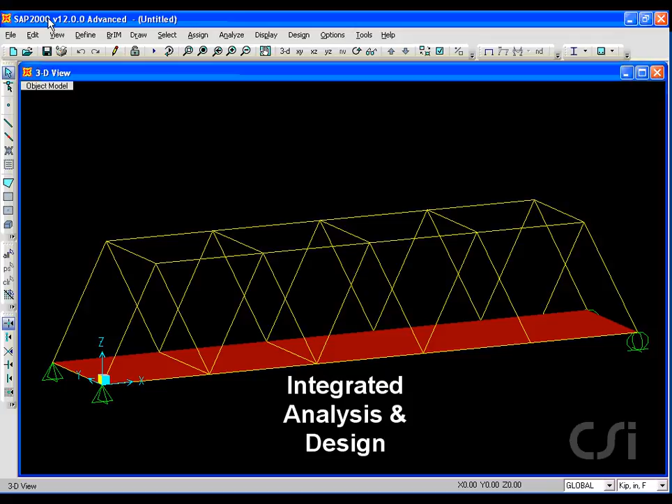Welcome to SAP 2000, a comprehensive yet easy to use, state-of-the-art finite element analysis and design package. In this tutorial, we will create a simple 5-panel truss bridge constructed of steel 4x4 double angles with a concrete deck.

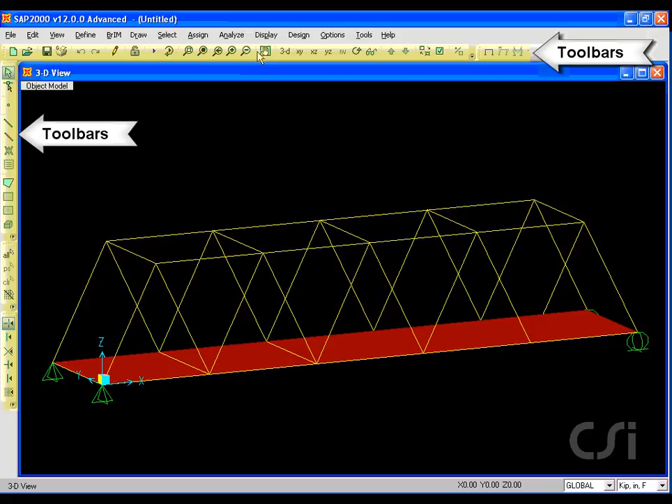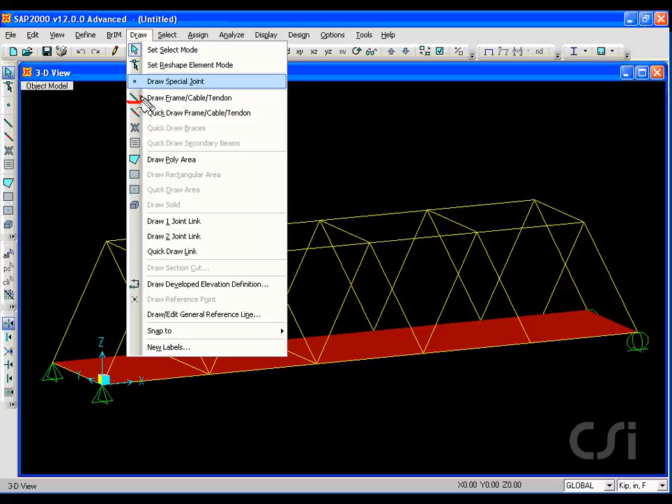Before we get started with modeling, let's take a quick look at the SAP 2000 interface. All the options are available through the top menu bar. Toolbars offer buttons that provide access to commonly used commands, including snaps, zooms, and views. An icon next to a menu command indicates that this item is also available as a one-click button.

Typically, one defines materials and section properties, draws the physical objects, selects these objects, and then assigns properties and loads to the objects.

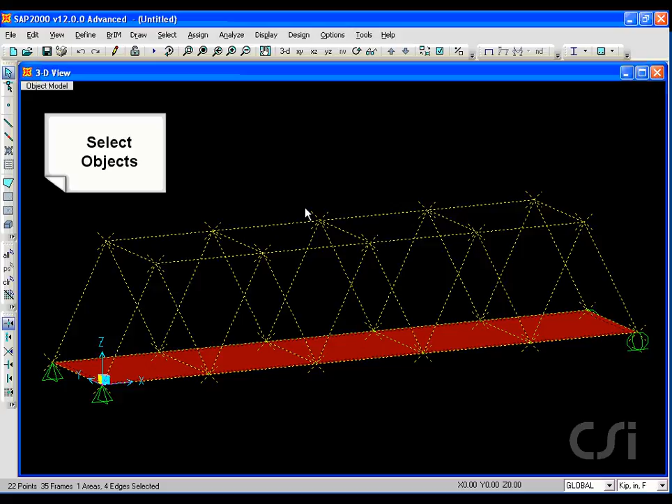We start the modeling process by clicking on the File New Model command. SAP 2000 offers a wide range of parametric-based templates to help create your models, including a slope truss template that is similar to our model. However, we will start by using only a grid definition.

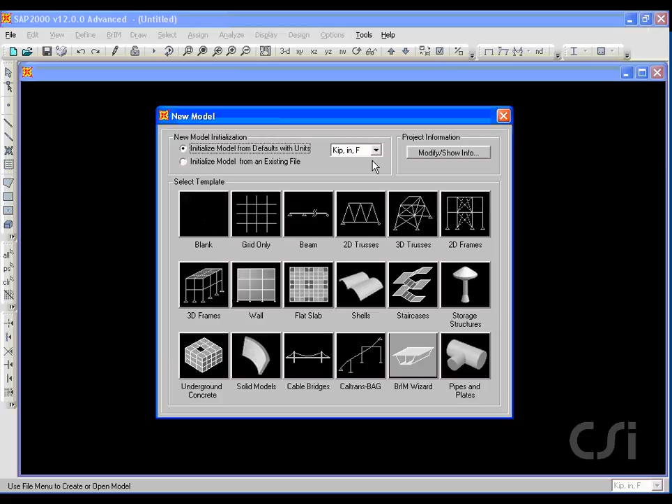A thoughtfully planned grid system can result in enormous time savings, so spend some time at the start to make sure your grid captures the main geometrical features of your structure. Note that we will use the units of kip inches as our default, but that the units may be changed at any time. Click on the Grid button and input the number of grid lines, followed by the spacing values.

Note that by explicitly specifying the units, we can enter these values in feet rather than inches, and the program automatically handles the conversion.

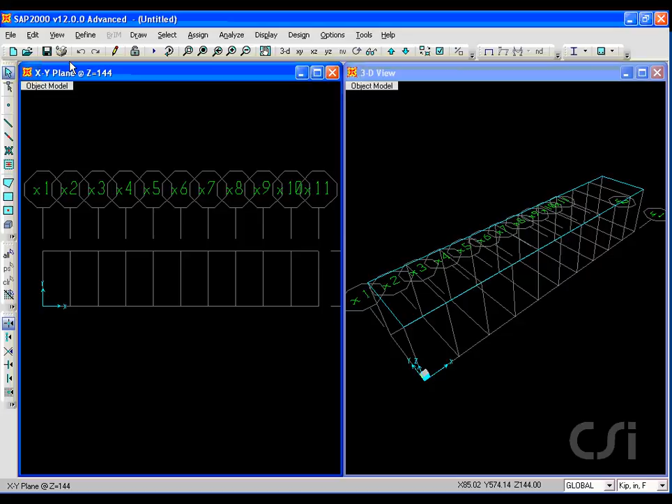Directly under the display title bars is an indicator showing the model status. This indicator will display either object model or analysis model. Objects represent physical members and are typically what the user draws in SAP 2000.

To make viewing our model easier, we will reduce the size of the grid bubbles. This is done through the Coordinate Systems Grids command, and we will use a bubble size of 36.

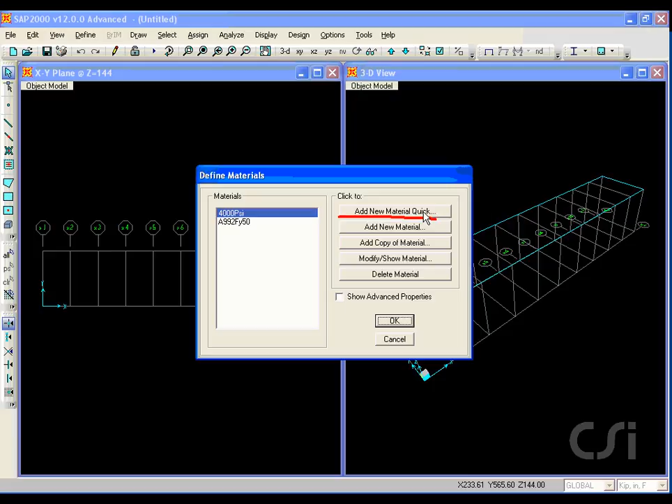Next, we will define a material to be used for the double angle sections. Click the Define Materials, and then click the Add New Material Quick button. Select Steel from the Material Type drop-down list, and then ASTM A36 from the Specification list. This is all we need to do to define a material when selecting from the pre-defined standards.

Next, define the truss objects by clicking on the Define Frame Sections command, and then click on the Import New Property button. Verify that steel is showing in the property type list, and then click on the Double Angle button.

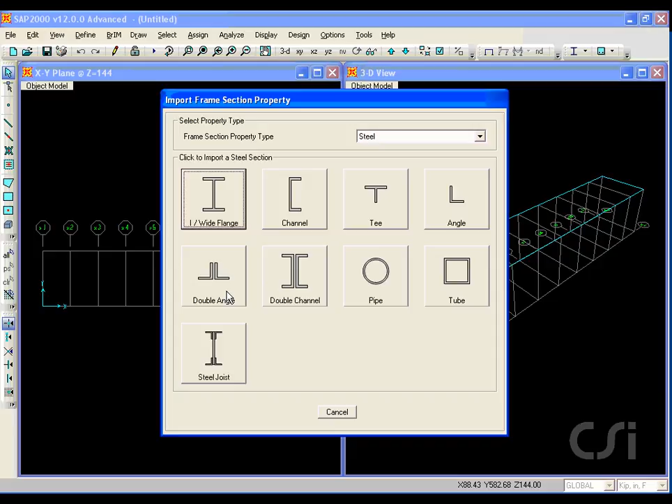Select and open the section database, and select A36 from the material list. Clicking on the plus button allows editing of the material or additional materials to be added.

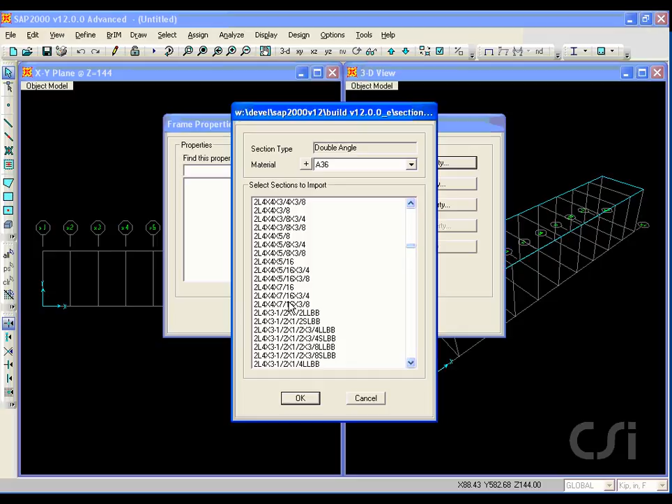Scroll down the double angle list until you locate the 4x4s. Select the entire group by holding down the Shift key and left mouse button simultaneously.

Now that these sections are available to the program, we are going to assign them to an auto-select sections list. This list will tell the program to choose from these angles when analyzing and designing the model.

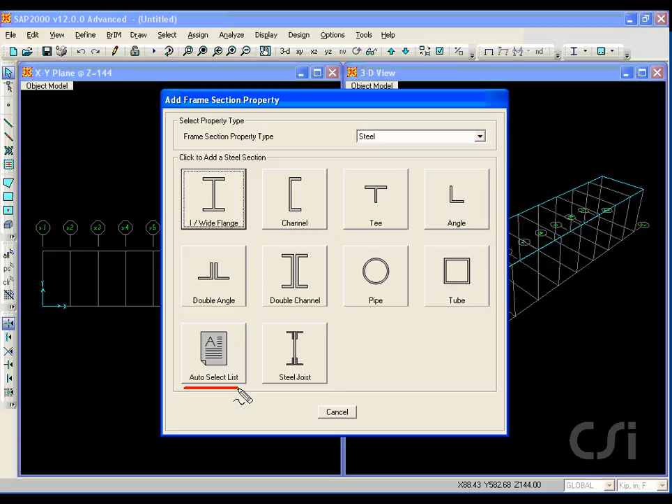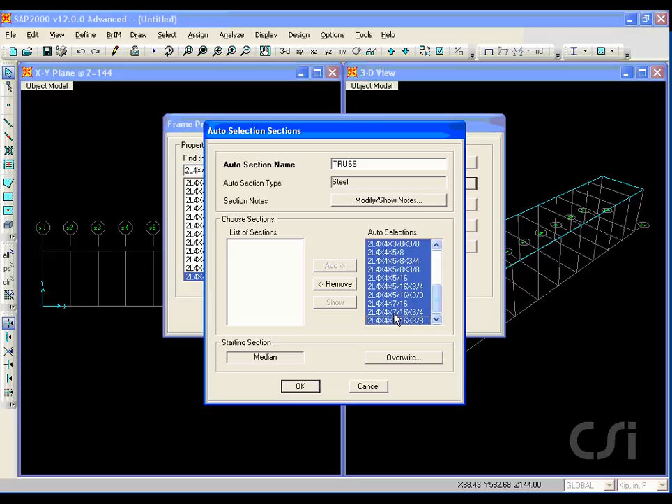Name the list Truss and select all the angles. The program will use the median section as the starting section in the initial analysis.

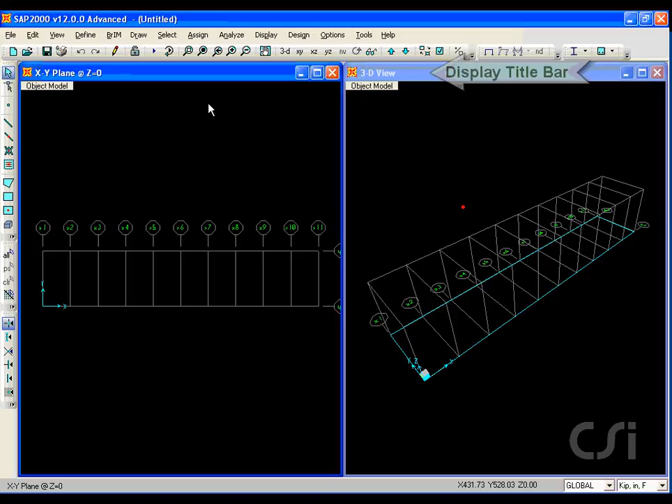We can now assign the truss list just like we would an individual section. Make sure that the left view or plan view is active and set to z equals 0. You can make a view active by clicking anywhere in the window, and you can verify that it is active if the display title bar is highlighted. Also note that the active view location is indicated in the other window.

Next, make sure that the Snap to Points option is on, and click on the Draw Frame icon. We are going to draw the truss objects and want the program to assign members from the truss auto-select list we created.

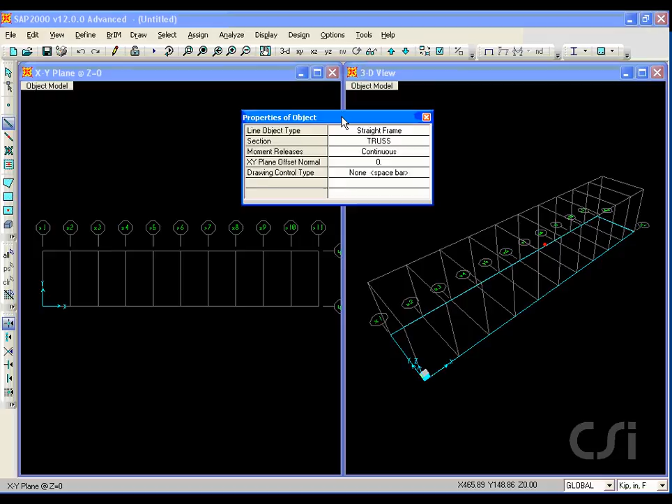Start by drawing the bottom chords. Click at the beginning and ending points to draw a single object that represents the physical member. Also draw the first cross object.

A right click will stop the drawing action, but leave you in the draw mode. Hit the Escape key or Select button to leave the draw mode.

Select the first cross member by clicking on it, and go to the Edit Replicate command. Specify a dx of 144 inches and a number of 5 to replicate across the bottom plan.

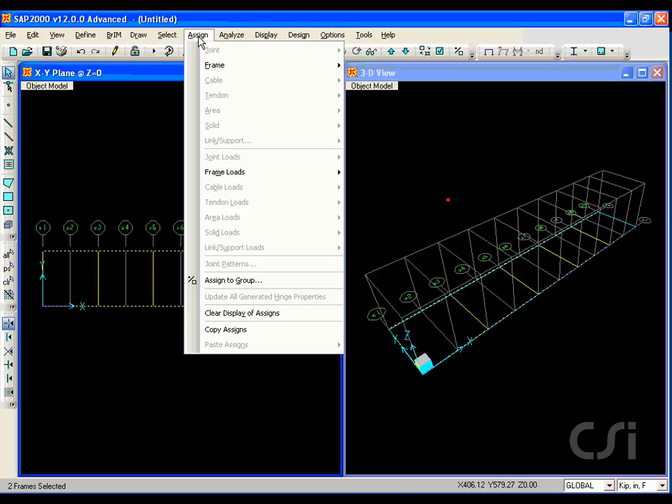Select both of the chords, remembering that they were drawn as single physical objects. The next step will tell the program to internally mesh these members so that they will be connected to all of the elements that frame into them, although from a selection and design standpoint, they will remain single members.

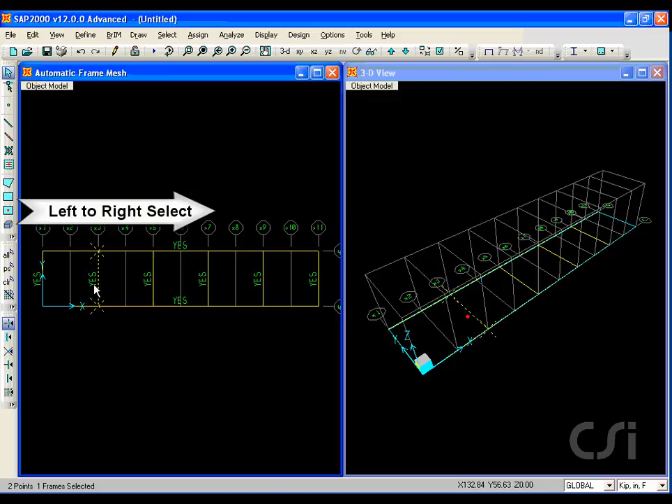As a general note, when in the selection mode, if you window from left to right, only items completely within the window will be selected. However, if you window from right to left, everything touched by the window will be selected.

Next, select the first 5 cross members and go to the Edit Replicate command. Set dx equal to 72 inches, dz equal to 144 inches, and number to 1. This will replicate these objects at the top level.

Next, shift to the top plan using the toggle keys, and draw the top chords using the Draw Frame command in much the same manner as the bottom chords.

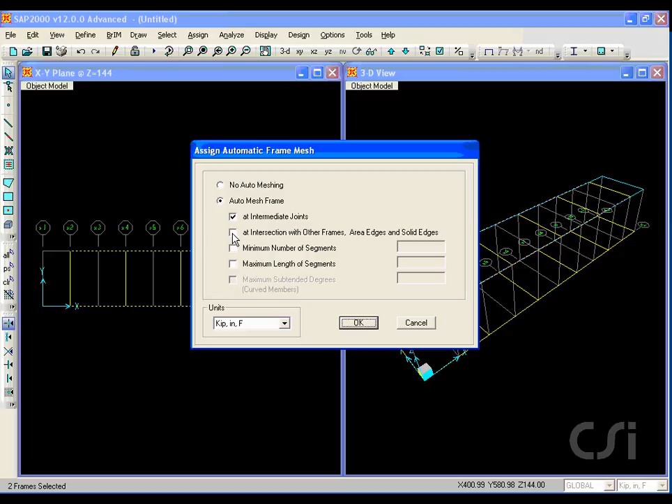Hit the Select Mode key to exit the draw mode, and select the 2 top chords. Once again, because they were drawn as single physical objects, we need to go to the Assign Frame Automatic Frame Mesh command to have the internal mesh created so that they will be connected to the other objects. Clear the window of the assigns, and then change the left window to an XZ elevation view at y equal to 0.

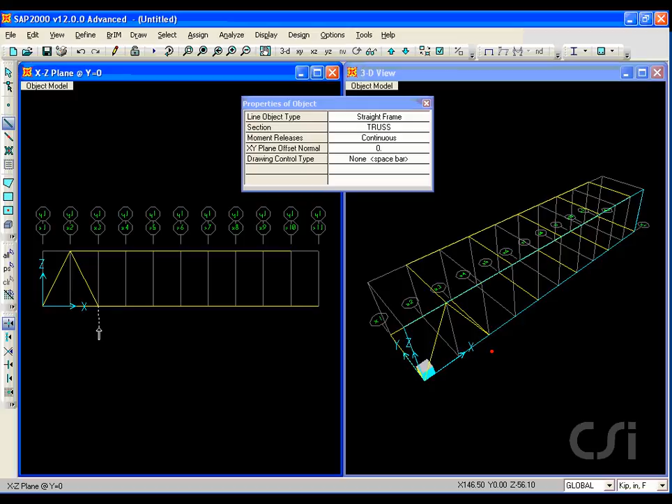Draw 1 bay's worth of diagonals using the Draw Frame command. When done, right-click and then hit the Select Mode button. Next, select the diagonals and go to the Edit Replicate command and set dx equal to 144, dy to 0 with 4 repetitions to generate the members needed to complete one truss.

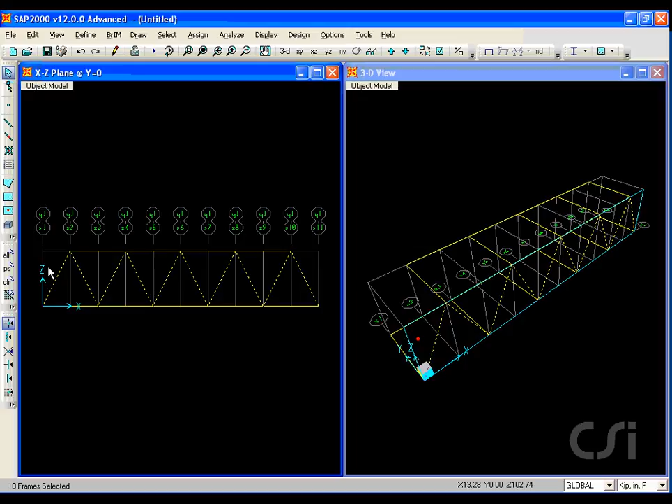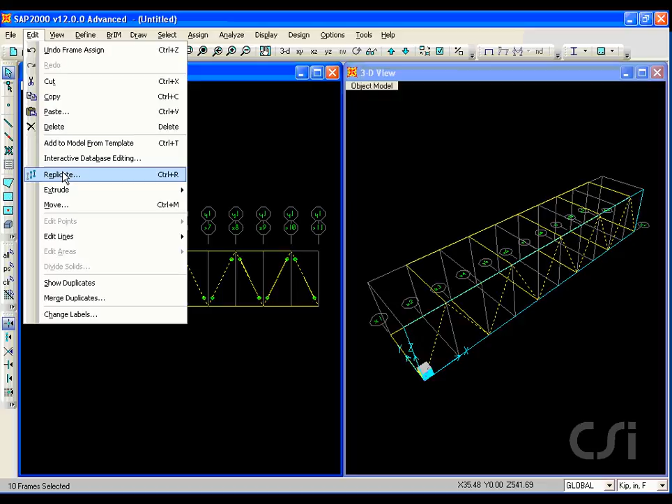Select all the diagonals and click on the Assign Frame Releases and set the M33 moment releases at both ends to on. This will result in the diagonals acting as pinned members. Select all the diagonals once again and replicate on the other side. Change the left window back to an XY plan view at Z equal to 0.

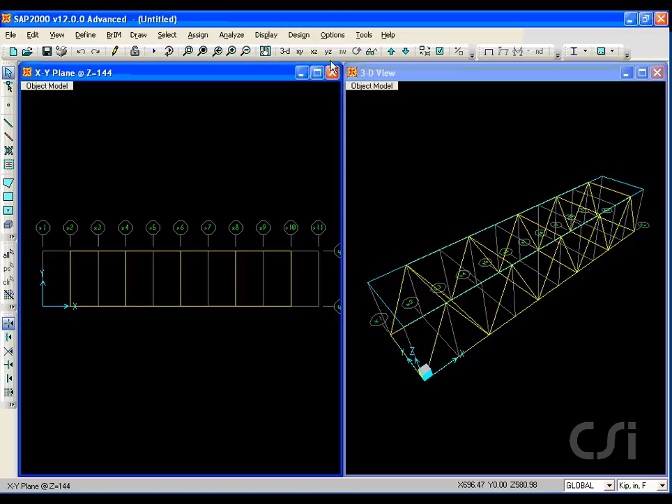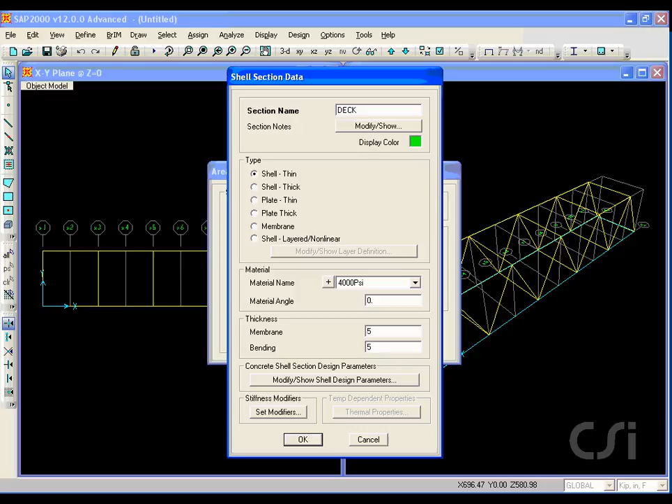And define the concrete deck by going to the Define Area Sections command. We will call the area section deck and use the default 4000 psi concrete. The thicknesses will be set to 5 inches. Next, draw the deck by using the Draw Rectangular Area command. Make sure that the property is set to deck and click on two opposite corners to complete the object.

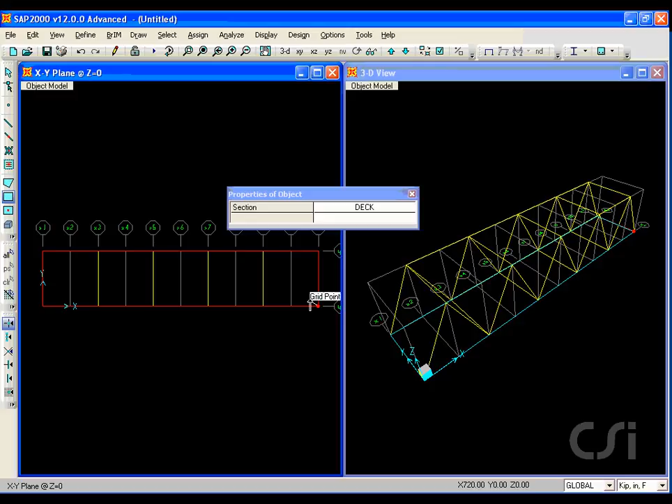Right-click anywhere on the deck to display the area information form. Object assignments and loads may be edited directly from this form. Select the Assignments tab and double-click in the Automatic Area Mesh Edit box. Select the mesh area based on points on area edges option and check the intersections of straight line objects. Since the deck was drawn as a single object, we are going to mesh the area object so that it will be connected to the intermediate points on the trusses.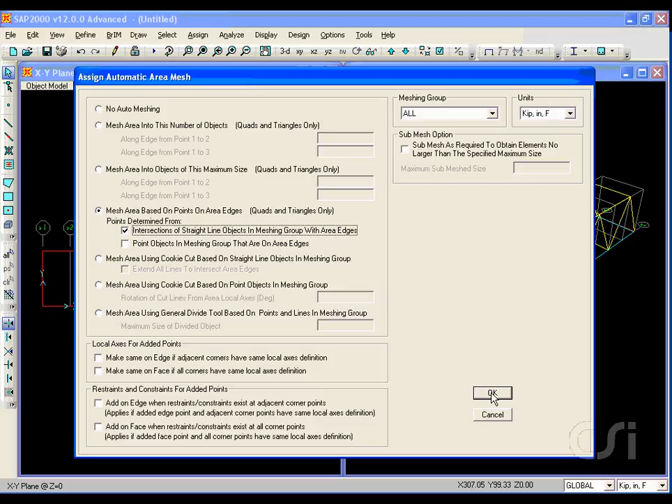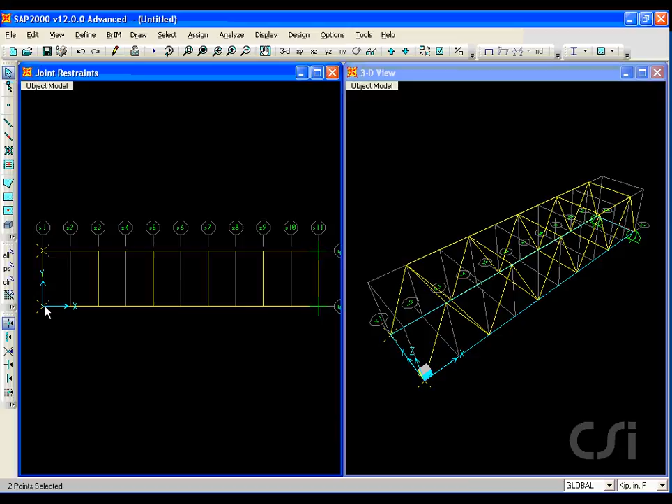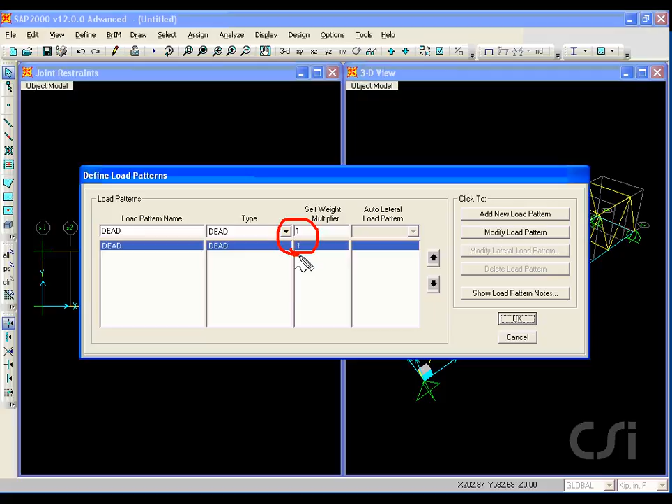Next, select the two joints at the right end and go to the Assign Joint Restraints command and select the roller support. Follow the same procedure for the joints on the left, but assign a pin support. A check of the default load patterns indicates that we have one pattern: dead load with self-weight included. We will now add a live load pattern.

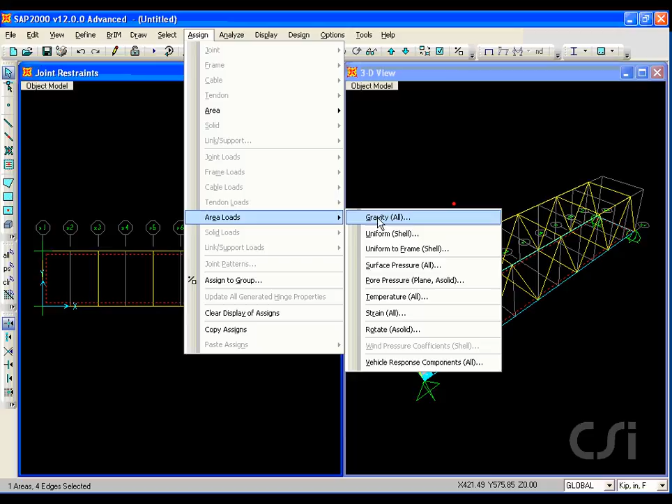Now we will assign loads by selecting the deck object and going to the Assign Area Loads Uniform command. For the dead load pattern, we will apply a uniform load of 10 pounds per square foot in the gravity direction. Repeat the selection process and this time assign a uniform live load of 100 pounds per square foot in the gravity direction.

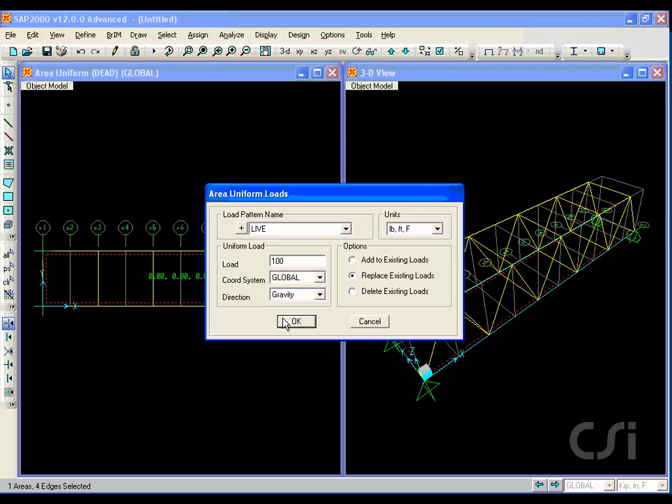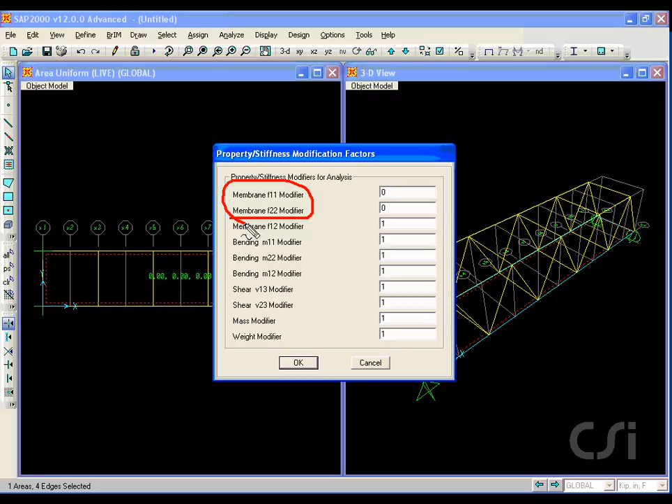Repeat the selection one more time, but this time we will be assigning a stiffness modifier to the deck. We are going to set the membrane modifiers equal to 0, which will prohibit the deck from carrying axial loads. We do this to keep the deck from acting as a flange for the bottom chord of the trusses. The model is now complete.

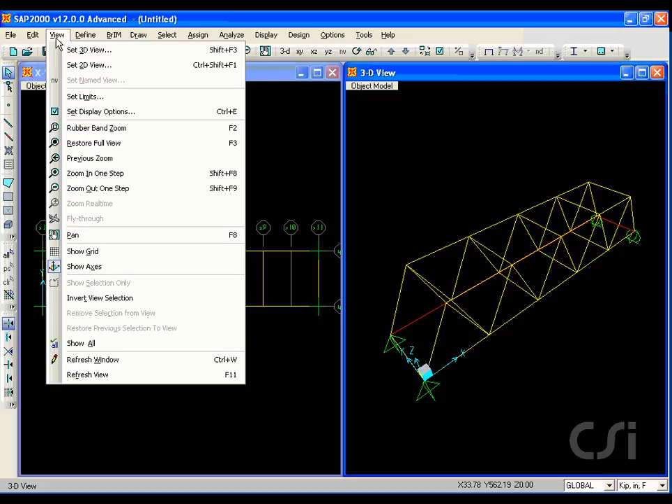To get a less cluttered view of our model, set the 3D window to active and go to the View menu and set the Show Grid option to off. We can also see the deck better if we use the Set Display Options command and fill the objects. We are now ready to analyze the model. Click on the Analyze, Run Analysis command and set the modal case to Do Not Run, as we wish to do a static analysis only. Click on the Run Now button.

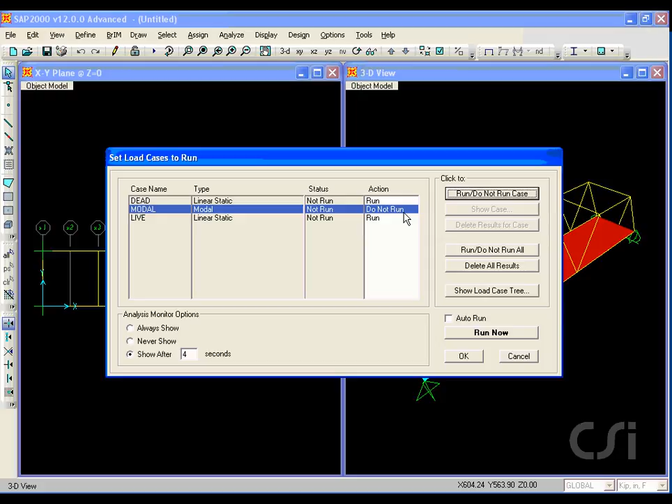After the analysis is complete, the active window is updated with the deformed shape. Note that the analysis model is now shown. Information about the analysis process may be accessed by going to the File, Show Input/Output Text Files, and selecting the log file. Here, you can verify the size of your model and that the analysis was completed.

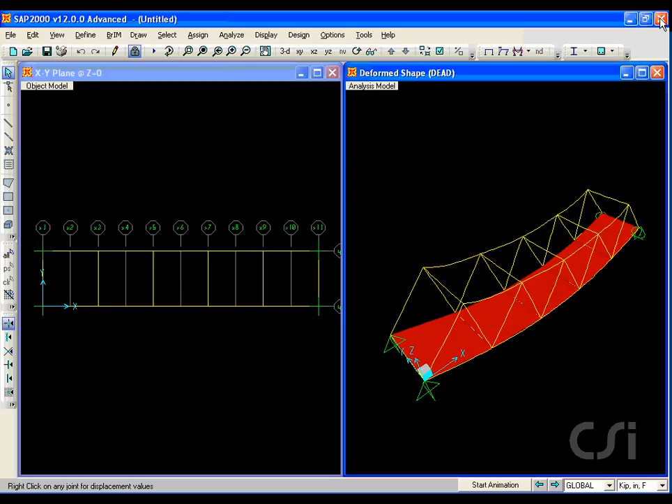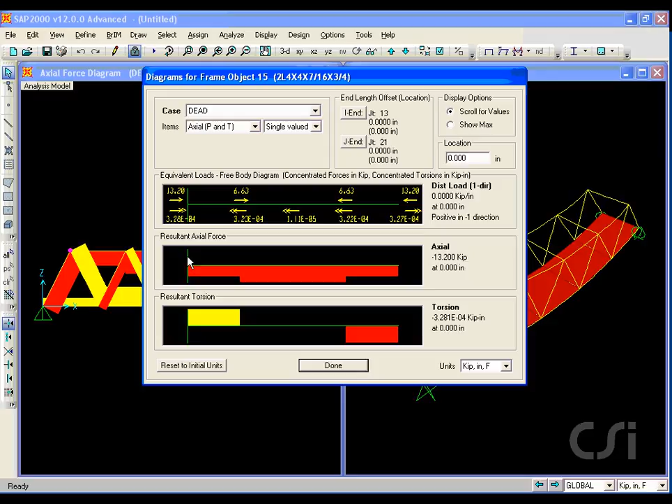Set the left window to active and click on the XZ View button to generate an elevation. Next, click on the Display Show Forces command and select Frames. Here you can choose the load case and type of force to be displayed. A right mouse click on an individual object will bring up detailed force diagrams for that particular object. Next, click on the Display Show Deformed Shape command. Similar to the forces, a right mouse click on a joint will display the displacements for that particular location.

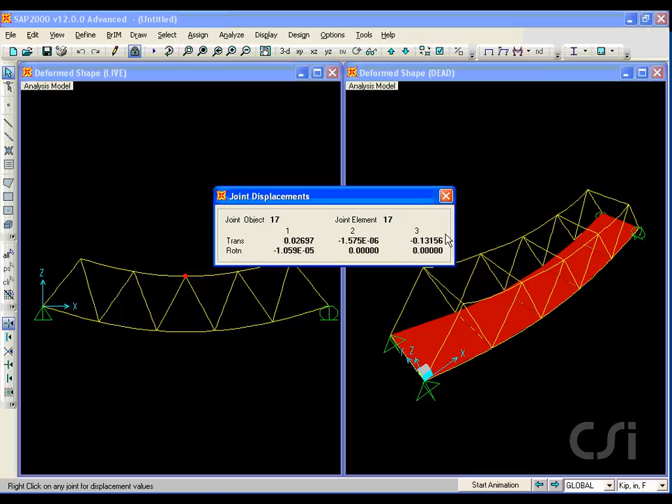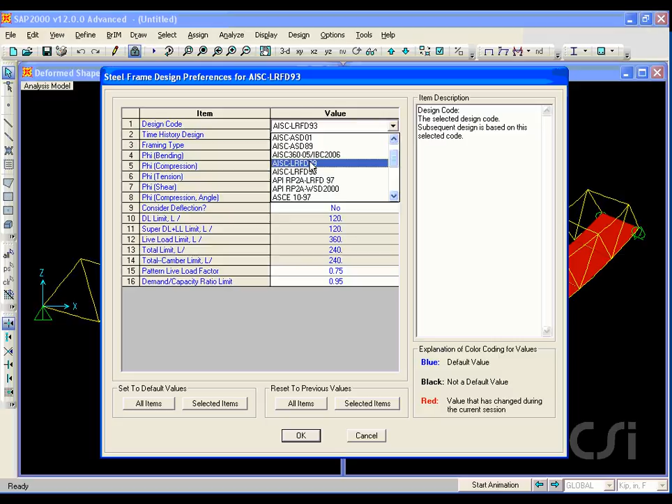We are now ready to start the design phase. Design options may be accessed through the Design menu. For our case, we will be using the steel frame design, and if you go to the View Revise Preferences command, you can set the various design parameters, including the design code to be used. For our model, we will use AISC LRFD 99. Next, go to the Design, Steel Frame Design, and click on the Start Design of Structure command.

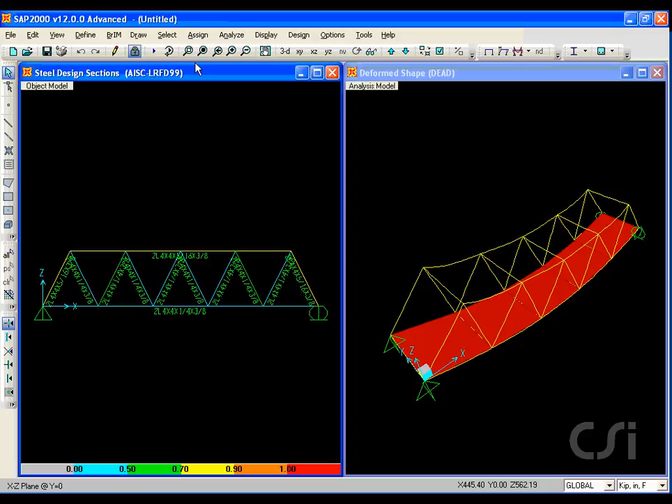After the design is complete, the design sections are displayed, and if we window in, we can see that the program designed the chords as single objects, even though for analysis they were meshed into smaller elements. A right mouse click on a design member will bring up stress check information, including the governing load combination. Note that the design section differs from the analysis section, so typically another analysis would be run, iterating until the two sections were the same. Clicking on the Details button brings up a calculation sheet with all the pertinent design values.

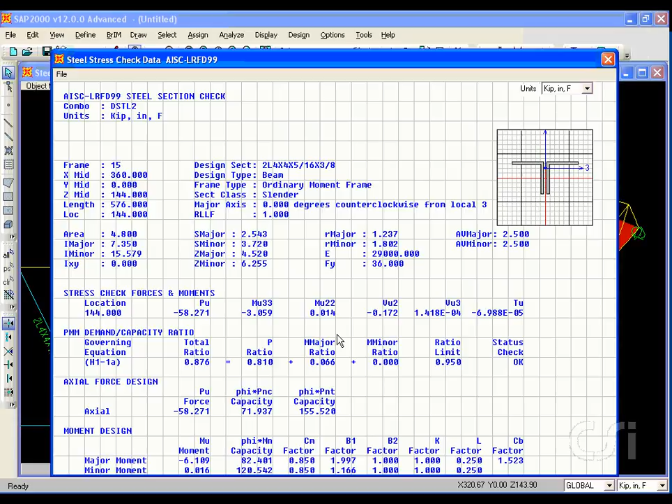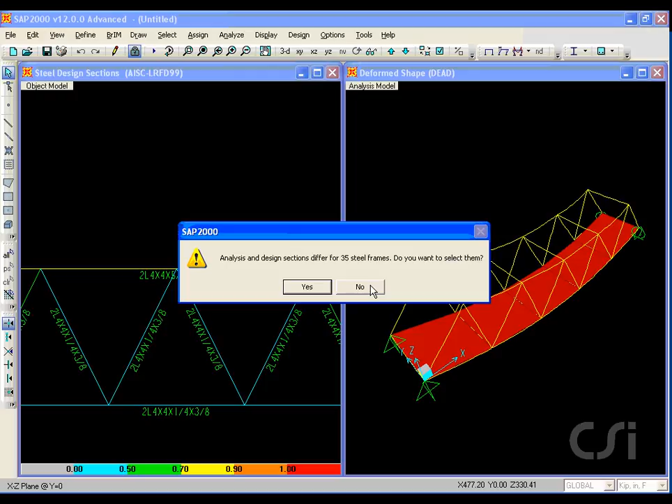As a last step, typically one would check that the design and analysis sections match by clicking on Design, Steel Frame Design, Verify Analysis versus Design Sections, as well as checking that all members pass the stress check. This concludes this tutorial.